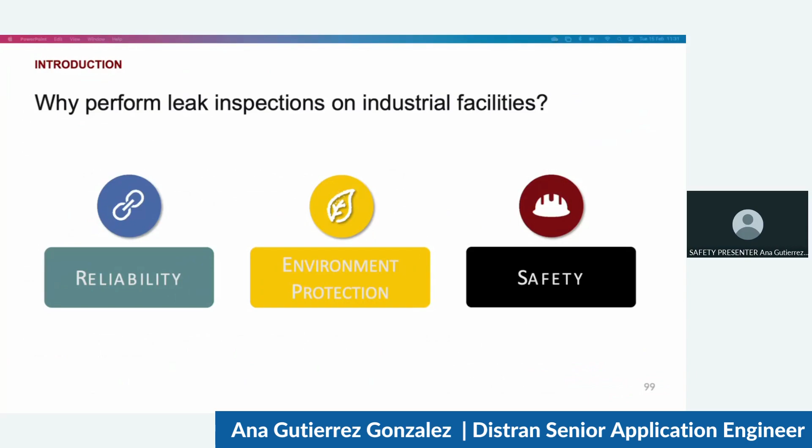So why look for leaks? Actually, for many reasons, including reliability, efficiency, and controlling environmental emissions. However, today we want to focus on the safety aspect. Regarding safety, accidents due to leaks can happen in many industries.

In the oil and gas field, for example, they work with methane and hydrogen, two flammable gases that can lead to explosions if they leak. In power plants, they also work with hydrogen, hydrocarbons, and other gases such as superheated steam, which can cause serious injuries to workers. In chemical plants, people handle other potentially hazardous gases that can present a safety hazard if they leak. However, traditional leak detection methods are either slow, not versatile, tedious, or even difficult for operators to use in the field.

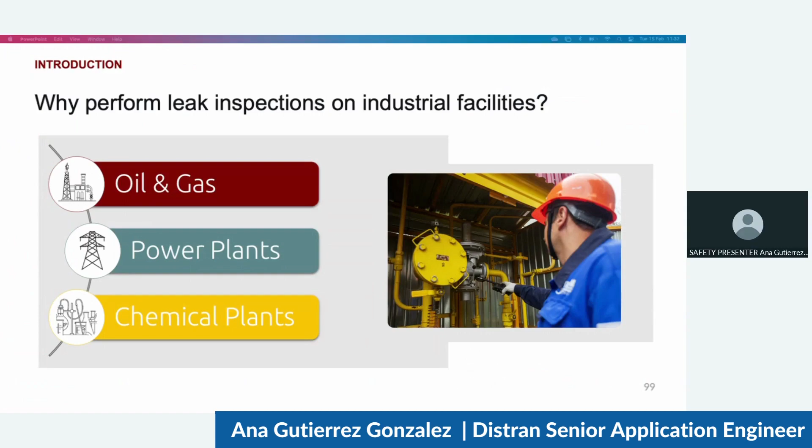For this reason, and as an alternative, at Distran we develop handheld ultrasound cameras for remote gas leak detection. With just the device you can see on this slide, we can detect leaks from any type of gas, including vacuum leaks, from a distance of up to 100 meters. Now let me show you how this works.

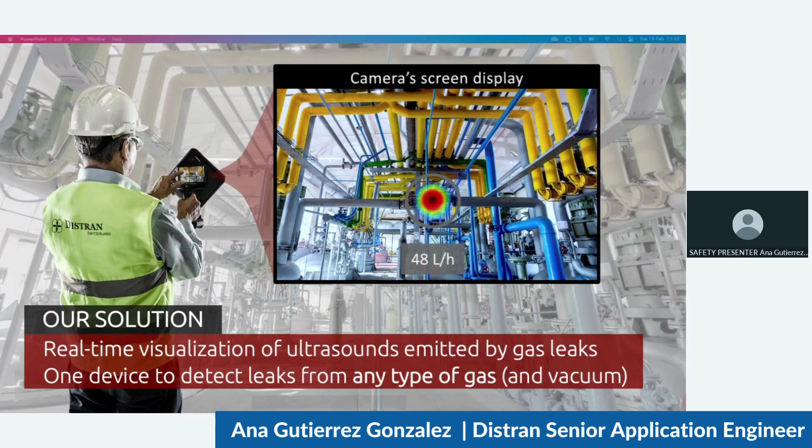Gas leaks are known to emit ultrasounds as a result of flow turbulences generated at the vortices of the expansion. An ultrasound camera picks up these sounds with 124 microphones displayed on the red front panel. By measuring the time differences it takes for the sound wave to reach each individual microphone, the camera is able to reconstruct the exact leak location. It then overlays this acoustic information with the optical video image, resulting in a result like the one we can see on the next slide, where we should have a video.

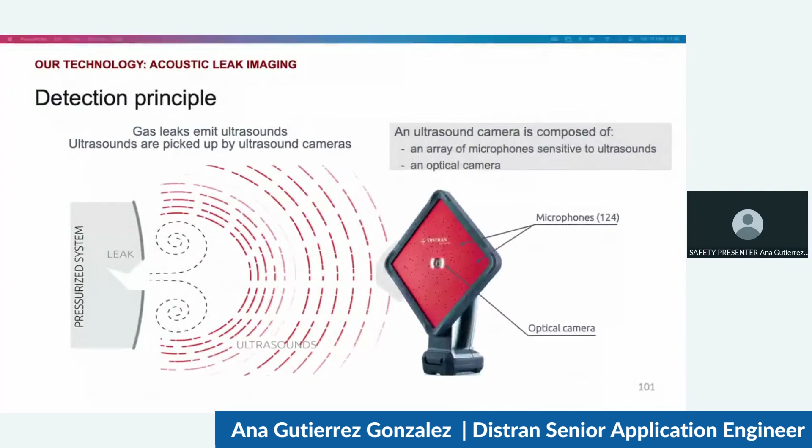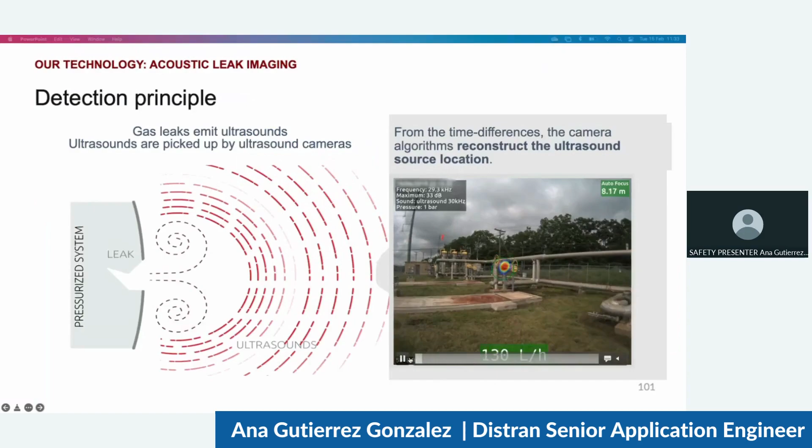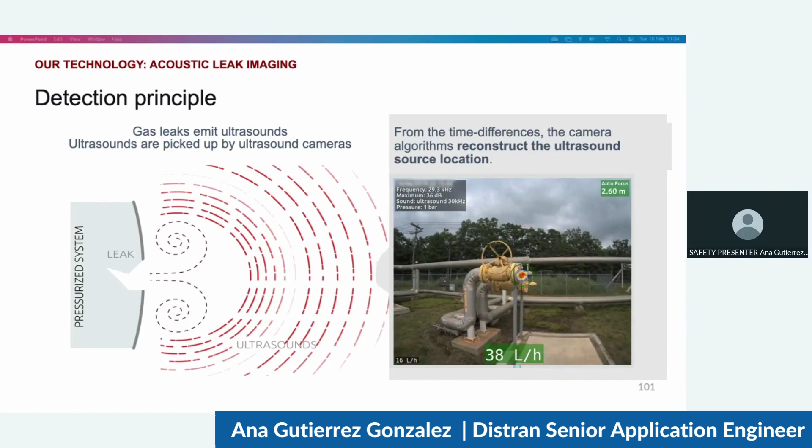This is a natural gas leak detected in a pressure reducing station from up to 30 meters. Here we can see how we went closer to the leak to exactly verify the leak location. With the ultrasound camera, any operator, even without a lot of experience, can really see leaks from a distance. Moreover, the camera quantifies in real time the leak rate, the amount of gas escaping, as you can see on the green rectangle at the bottom.

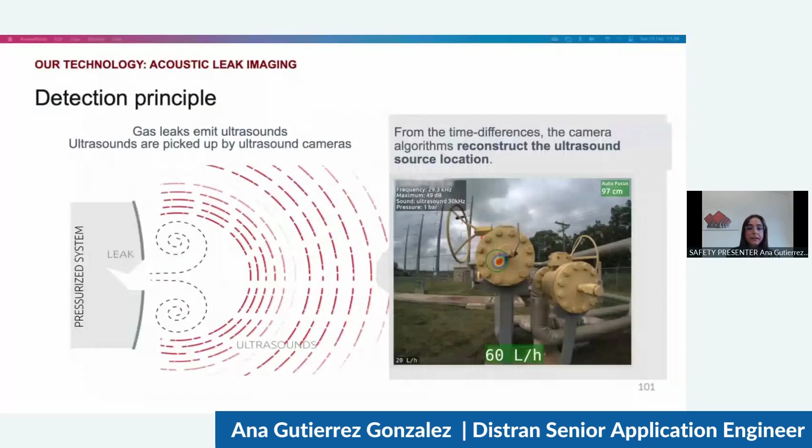Now I'd like to show you some of the sectors currently using our camera. We have customers in the oil and gas field, from upstream detecting leaks in offshore rigs to downstream in refineries and petrochemical plants, or midstream detecting natural gas leaks in compressor and pressure reducing stations, or even LNG leaks.

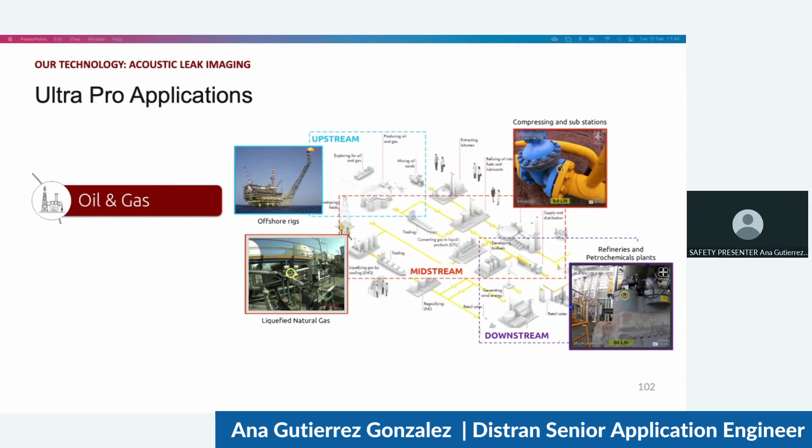We also have the camera used in power plants, where they detect steam, methane, or air leaks in very challenging situations, like this example of an air leak detected inside the enclosure of a steam turbine from a distance of 15 meters, in a very noisy area.

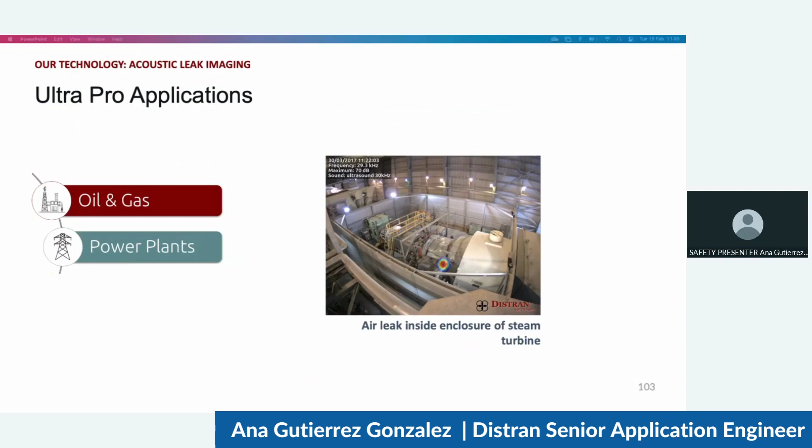In chemical plants, the device is well suited because it can detect leaks from any type of gas, including the acetylene leak we can see here, nitrogen leaks, or even vacuum leaks as I mentioned before.

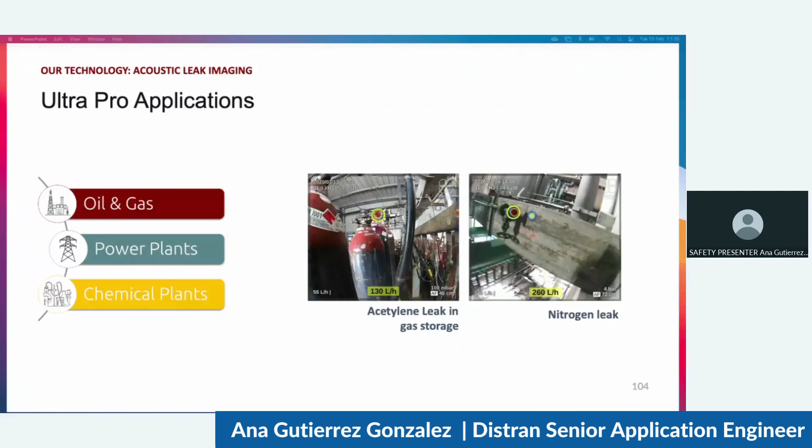To conclude, ultrasound cameras are a novel technology in line with the latest requirements. They increase the quality of surveillance, allowing us to locate leaks faster than any other method from a safe distance in potentially explosive areas, since the device is ATEX certified, and also in unexpected locations where leaks would probably be missed with other methods. Moreover, it can quantify leak rates in real time based on specific gas models, and it offers digital reporting to favor traceability when documenting findings.

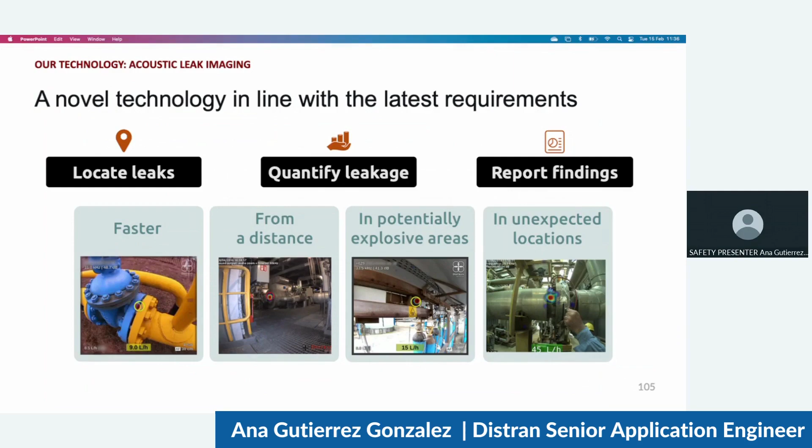The Ultra Pro, even though it's a new technology, is proven and established, and is nowadays used by industrial leaders around the world, such as Total, Shell, BASF, or even NASA. With this short presentation, I hope I've given you a slight overview of what you can do with an ultrasound camera. If this has triggered your interest, please don't hesitate to have a look at our website and contact us. We'd love to hear from you.

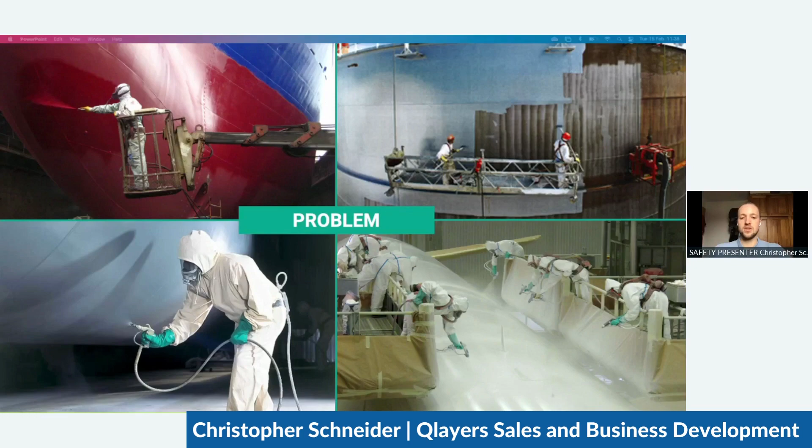In practice, we see that usually 30%, sometimes even more, up to 50% of the paint is wasted because of overspray, meaning paint particles go to the environment and become a hazard for workers and the environment itself. So what we have is a special shielding system.

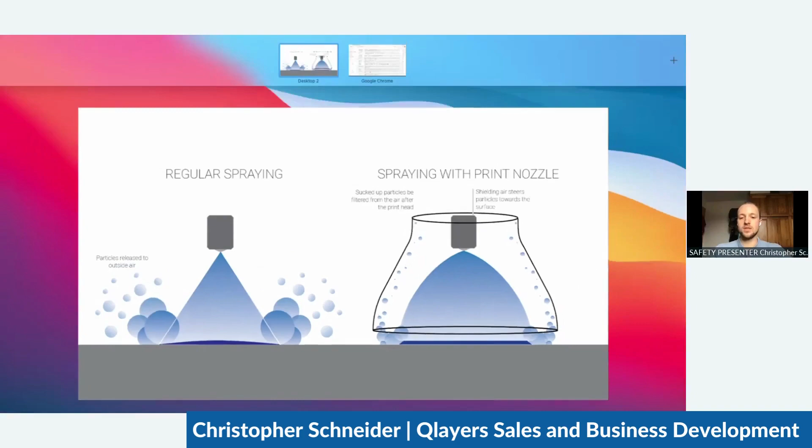On one side, we chose a print nozzle which ensures a transfer efficiency of 90%. That means at least 90% of the paint actually lands on the surface, and the 10% that doesn't is sucked up by a suction system. That way, it's ensured that basically no particles escape. This is also supported by the hood, which you can see here, surrounding the spray nozzle. That way we can make the process safer.

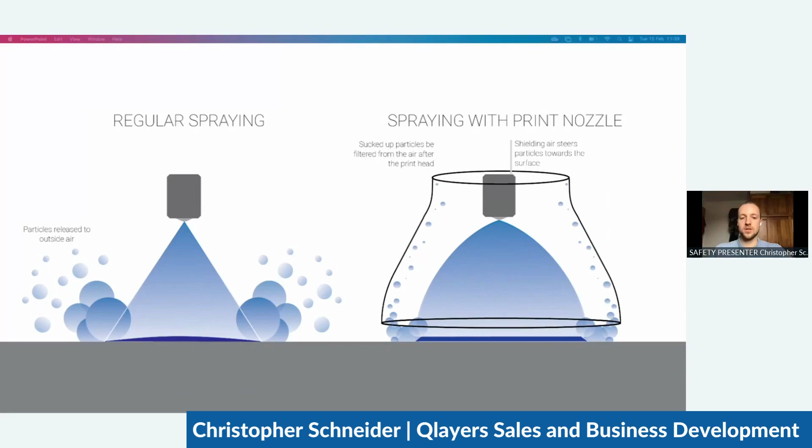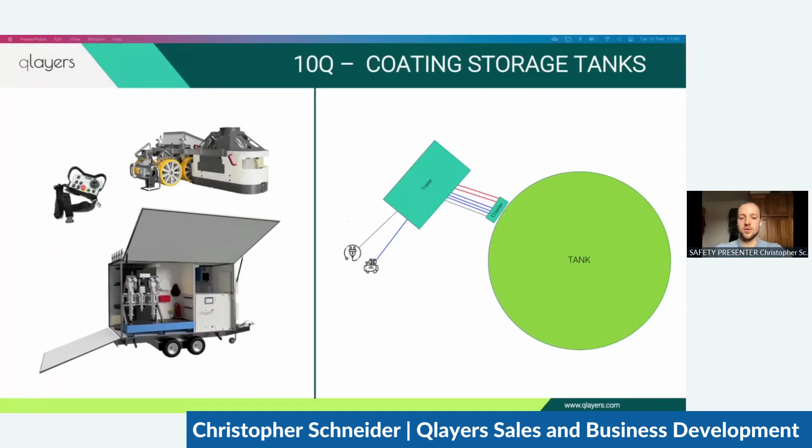The crawler itself is magnetic, put on the tank, and secured using fall arresters. Then it drives along the tank vertically from right to left, coating the tank all around. On the next slide, you can see a comparison between the manual and robotic process.

As said before, precision is a big advantage of the robot, since we can control factors like paint flow and the speed of the robot. We can ensure a consistent layer thickness at every position of the tank.

That way we can also predict degradation and maintenance better. It's also safer, since for the parts the robot can cover, we don't need people working at heights. And it's drastically faster, especially compared to the rolling process.

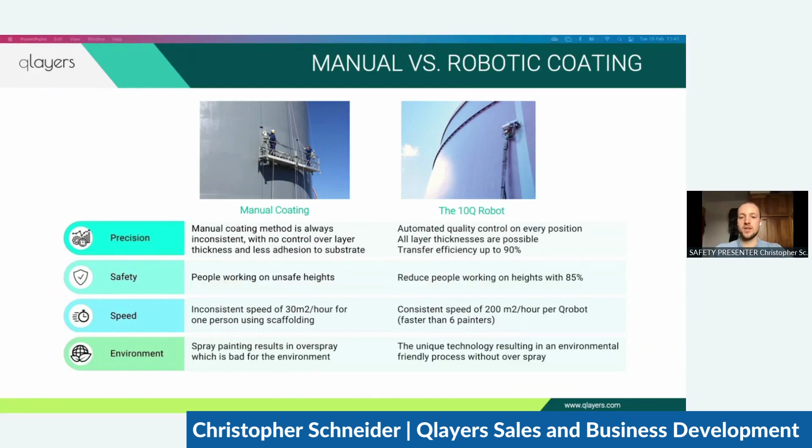We see the robot going at the speed of around 6 workers. And in the end, it's also more environmentally friendly, because paint waste is reduced, and the paint particles that don't land on the surface are collected, so they're no hazard to the environment.

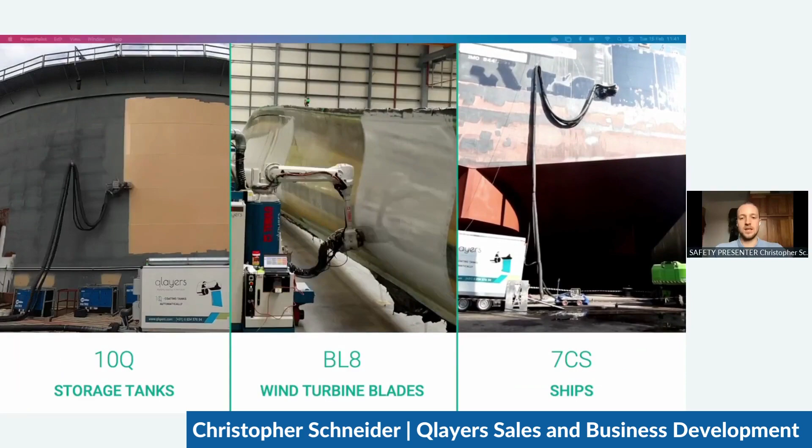On the next slide, you can see videos of the robot in action. Here's the tank crawler for storage tanks. We also developed a robotic arm, which you can see in the middle, for wind turbine blades.

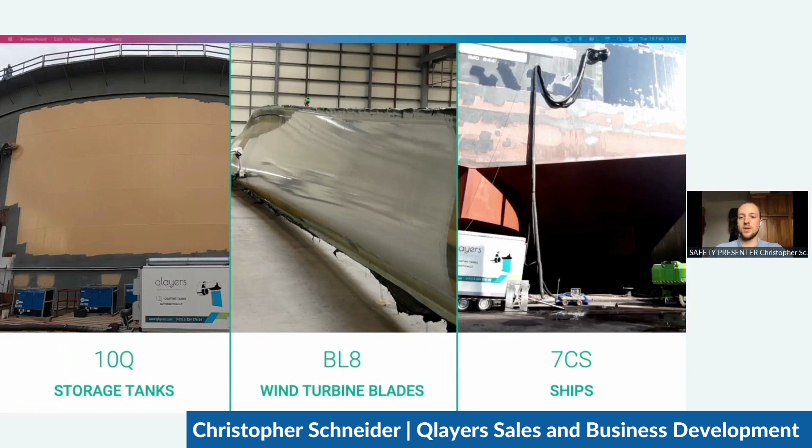What's special about the robotic arm is that it's also able to coat more complex and smaller structures. We saw, especially with wind turbine blades, that a crawler doesn't work properly, also because the material isn't magnetic. We also tested our crawler last September on ships, because on large flat surfaces, as you can see here, the robot works quite well, making the process a lot safer and better for workers and the environment.

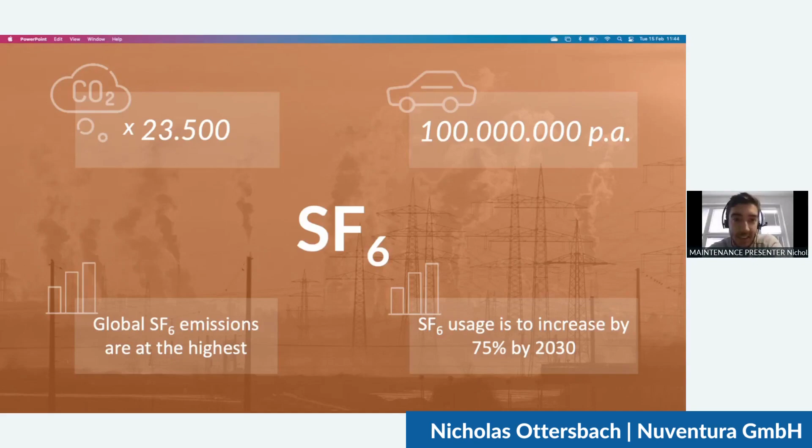So switchgear can be found throughout electrical infrastructure, from wind turbines to substations to these anonymous looking switching houses that you often see at street level.

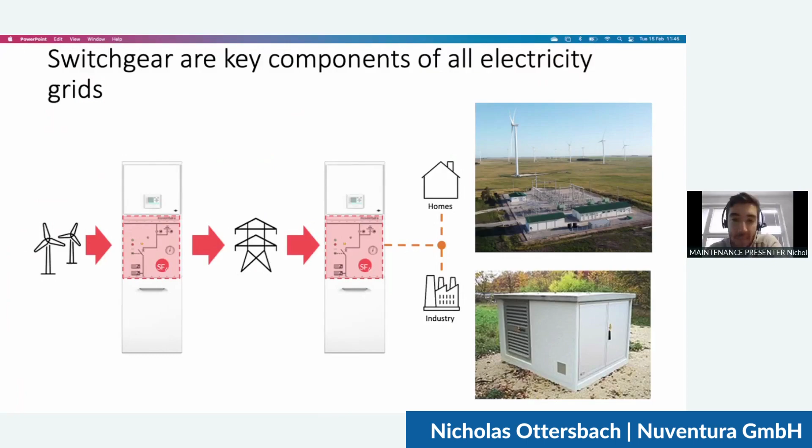Because of this pretty strong impact on the environment, SF6 is attracting more and more attention from regulators around the world, predominantly the European Commission and also the California Air Resources Board in the United States. They're both expected to call for the phasing out of SF6 in the energy industry by 2025. More recently as well, the Chinese government has also created a working group focused on evaluating the use of SF6 and potential replacements for this gas in the Chinese electrical infrastructure.

So because of the environmental impact and the regulatory oversight that is becoming more and more active, we need sustainable alternatives to SF6 using GIS, and that's where Nuventura comes in.

We've developed a medium voltage gas insulated switchgear, which replaces the SF6 with dry air. That's essentially just normal breathable air, but with the moisture sucked out. We've achieved this while maintaining all the benefits that make SF6 GIS attractive around the world, namely compact physical dimensions and also high reliability.

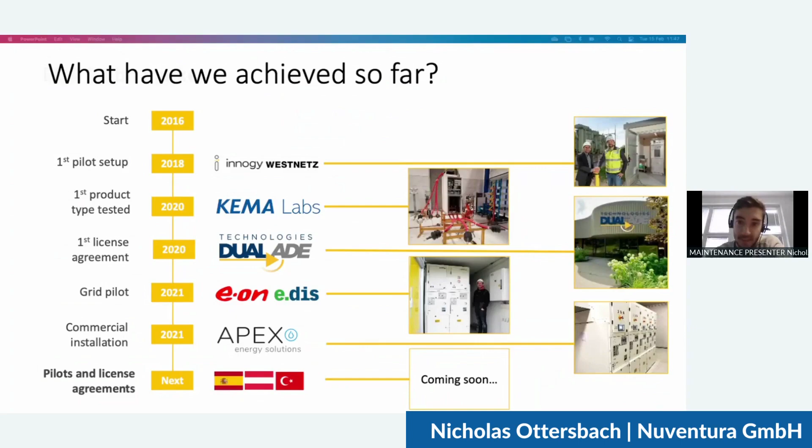So yes, I think that is the final slide. Thank you very much.

Thank you very much, Nicholas. I have to admit, before your submission was made for the awards, I had heard of SF6, but I didn't realize it had so much impact. So thanks for also highlighting that during today's presentation.